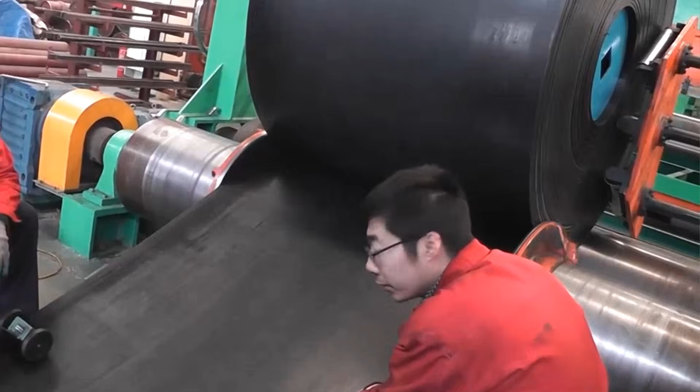The countdown began with number 9. Daniel Reyes arrived early for his shift at the Springfield, Illinois food processing plant on April 12, 2019. Known as Dan to his co-workers, he had spent 14 years maintaining the same conveyor system, often working extra hours to support his 2 children. He was assigned routine maintenance on a production line that had been flagged 3 weeks earlier. That inspection had documented an exposed roller missing its guard, and the report remained unresolved as production deadlines took priority.

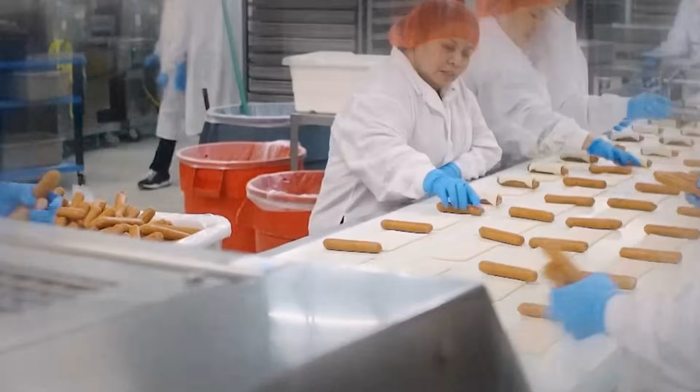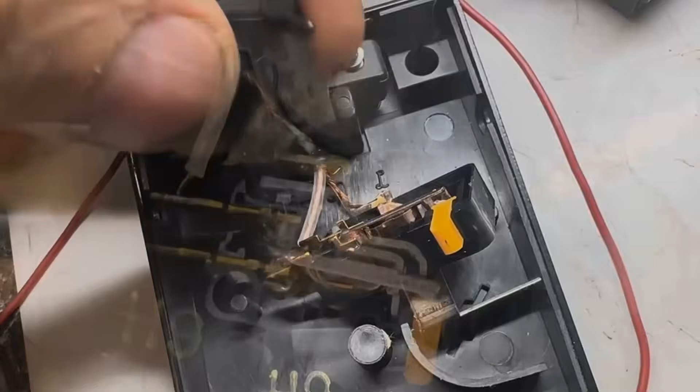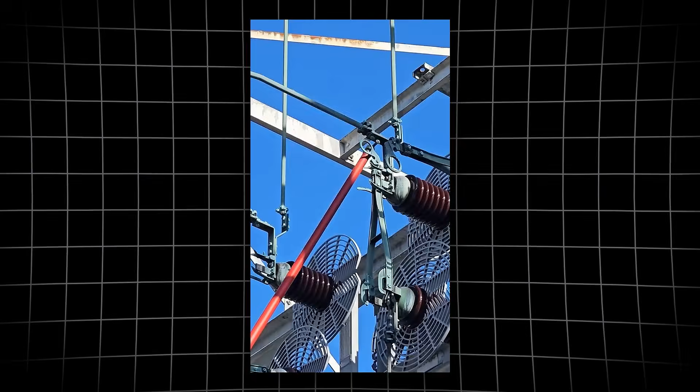That morning, Dan reached across the moving belt and his shirt sleeves snagged on the rotating roller. In seconds, his arm was pulled into the machine. He reached for the emergency stop, but the button failed because the electrical contacts were corroded. The conveyor's compression force pinned his torso, causing crush injuries to his ribs and lungs. Coworkers cut power at the main disconnect, but by the time paramedics arrived 7 minutes after the 911 call, Dan was unresponsive. He was pronounced dead 11 minutes after the call was placed.

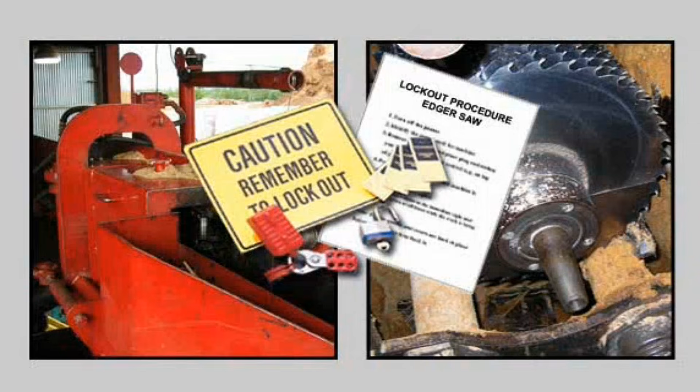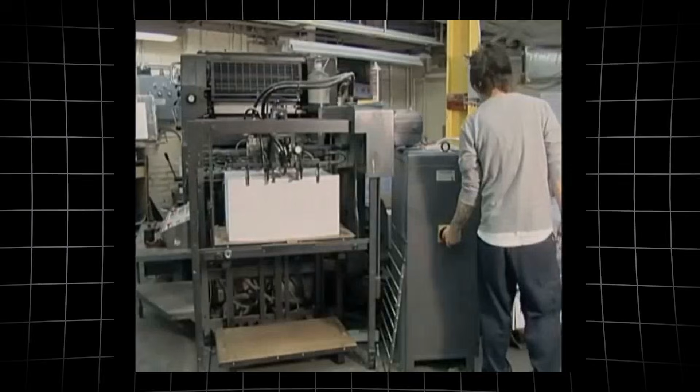OSHA cited the facility for lockout and tagout violations under citation number 2019145 and issued a $147,000 fine. Dan's family received a $1.2 million wrongful death settlement. The case triggered a nationwide amendment to 29 CFR 1910.147, mandating strict enforcement of lockout and tagout protocols in all U.S. factories.

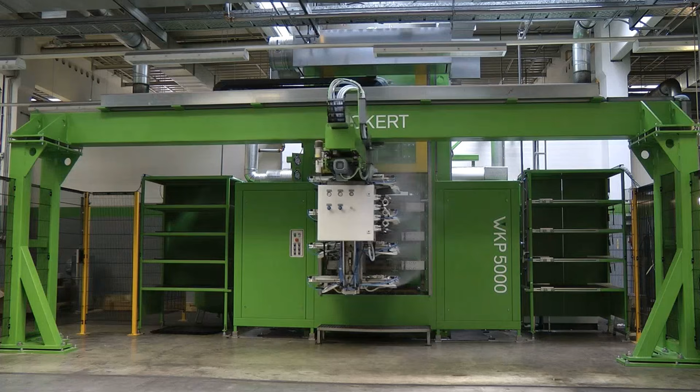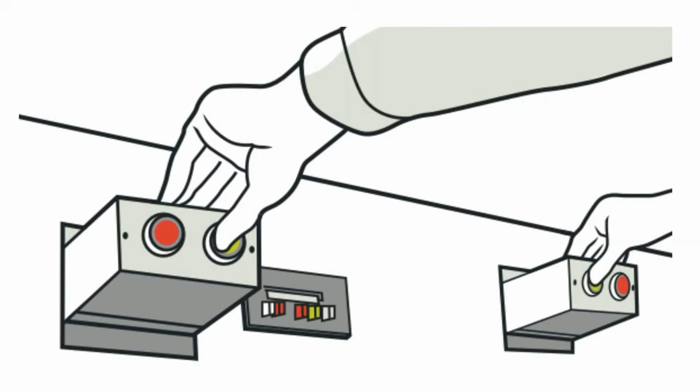Jacob Mills was 28 years old, recently engaged, and had just been promoted to quality control inspector at an auto parts plant in Chattanooga, Tennessee. On August 19, 2020, he was assigned to inspect a finished component inside the Omnivex H3000 hydraulic press. The press cycled every 8 seconds, a rhythm Jacob knew well. That day, the 2-hand control system, meant to keep both of his hands safely outside the chamber, had been jumper wired to speed up inspections. A faulty PS42 pressure sensor falsely signaled the press was clear, even as Jacob leaned in.

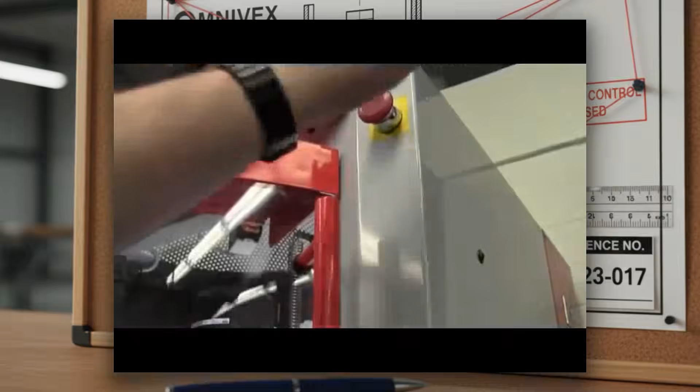The chamber closed without warning. The descending ram crushed his head and torso, causing catastrophic trauma. Coworkers hit the emergency stop within 2 seconds, but the force of the hydraulic system made rescue impossible. Jacob was pronounced dead at the scene. The press lacked a light curtain, a safety feature that would have prevented activation with a person inside.

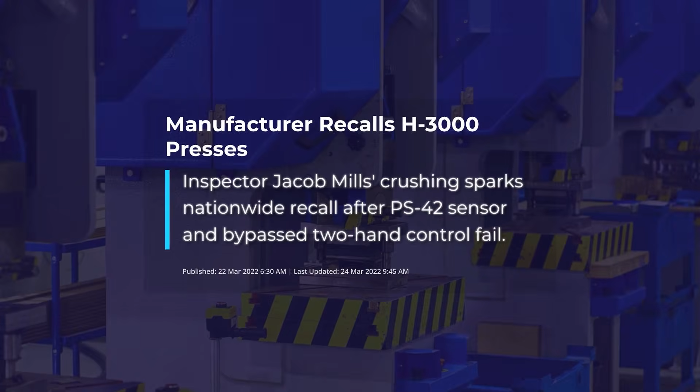District attorneys filed reckless homicide charges against plant management. The press manufacturer issued Recall 20042 for all affected models. ANSI B11.2 was updated, making light curtains mandatory across the industry. Jacob's death forced a nationwide reckoning with the dangers of bypassed safeguards and single sensor reliance.

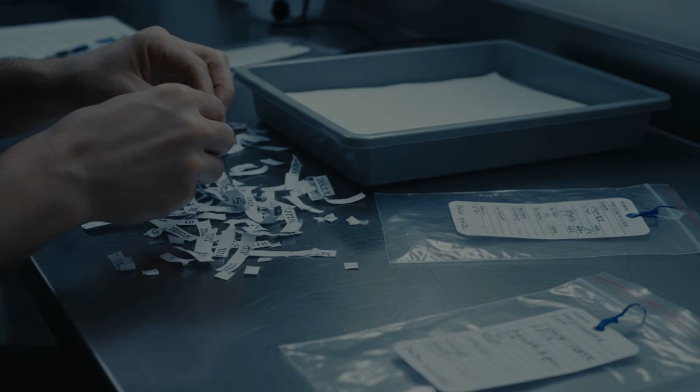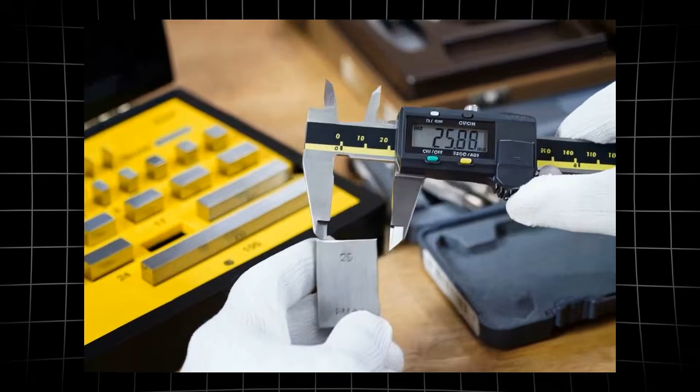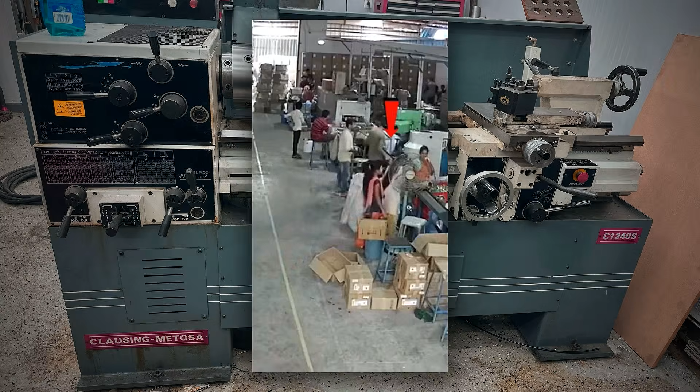Olivia Chen arrived at her Albany metal shop before sunrise, as she had for 15 years. At 42, she was a mentor machinist, respected for her precision and the way she guided new hires through the hazards of rotating equipment. The company handbook required hair restraints, but enforcement had faded into routine. On February 11, 2021, Olivia prepared a custom order on a Clausing-Metosa C1340S lathe, setting the spindle to 1,200 revolutions per minute. A single lapse, her ponytail left unbound, proved fatal.

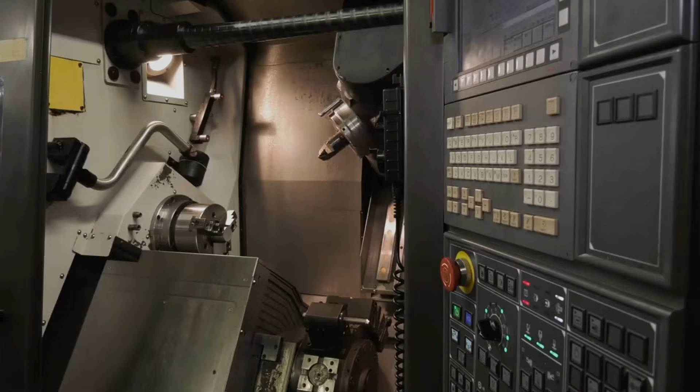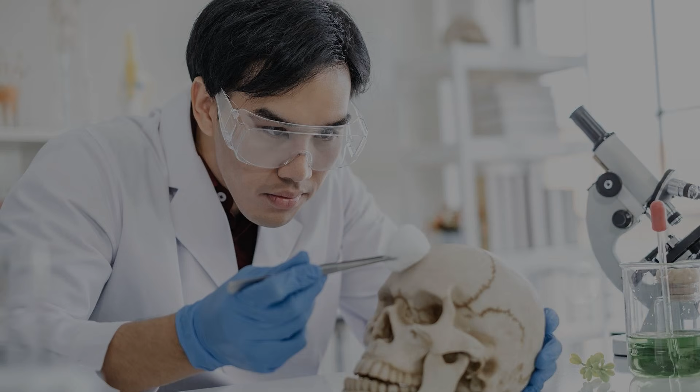As she leaned in to measure a cut, her hair caught in the spinning chuck. The torque at that speed tore her scalp away and slammed her head against the steel bed, fracturing her skull. The emergency stop was mounted 6 feet from her station, out of reach in those seconds. Co-workers dialed 911 as soon as they heard the impact. Paramedics arrived 6 minutes later, but Olivia died from head trauma and hemorrhage within 4 minutes of the incident.

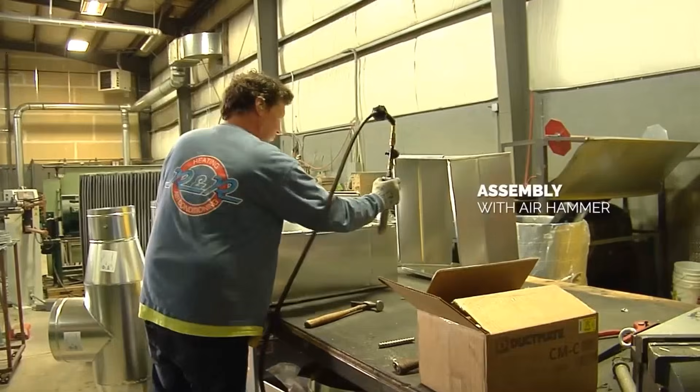Investigators found written policies for hair restraints, but no audits and no discipline for violations. The owner pled guilty to willful OSHA violation and served 6 months in jail. New York's Industrial Code Rule 121 was amended, mandating enforced personal protective equipment policies and reachable emergency stops at every workstation.

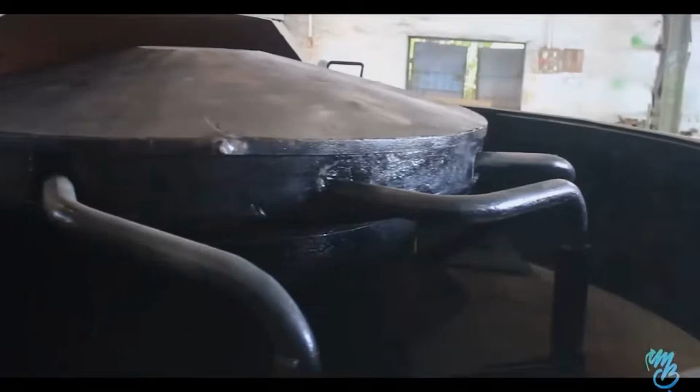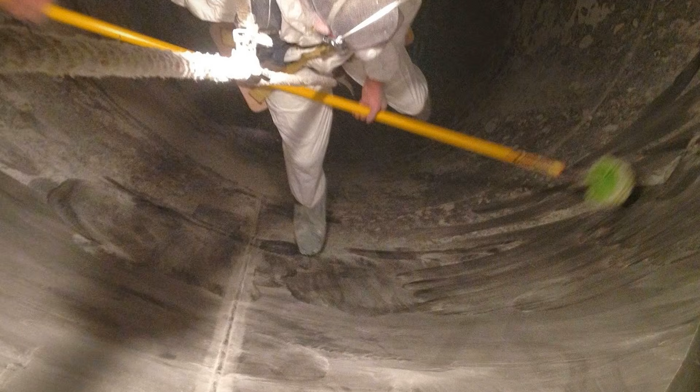Marcos Alvarez was 23 years old, single, and new to the overnight sanitation crew at a chemical processing plant in Portland, Oregon. On October 7, 2021, he was assigned to clean the interior of an 8,000-gallon Chempro MX 8000 industrial mixer. The vessel, a towering steel tank lined with chemical residue, required entry for deep cleaning. Protocol demanded a confined space permit and a trained attendant at the hatch, but neither was in place. Marcos entered the tank alone.

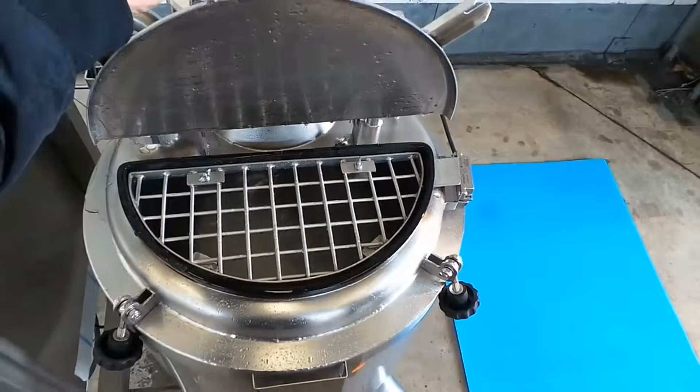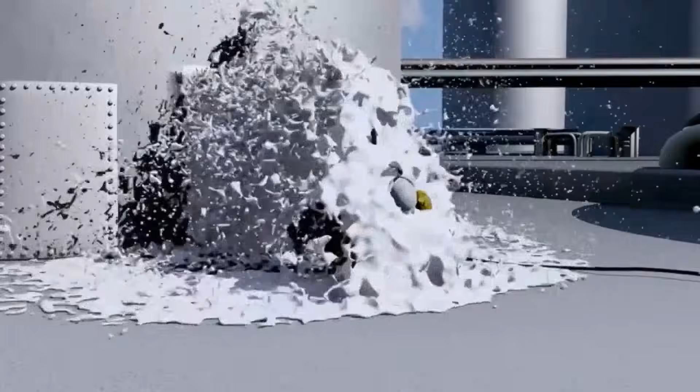The plant's wireless control system used Bluetooth signals to operate equipment throughout the facility. That night, a signal overlap from a nearby workstation remotely activated the mixer's internal agitator blades. Marcos was still inside. The blades started without warning, striking him and knocking him unconscious. He slipped beneath the chemical solution, suffering blunt force trauma and chemical burns.

There was no one posted at the entry, no one to notice his absence. 45 minutes passed before a co-worker realized Marcos was missing. By the time rescue teams arrived, he had drowned.

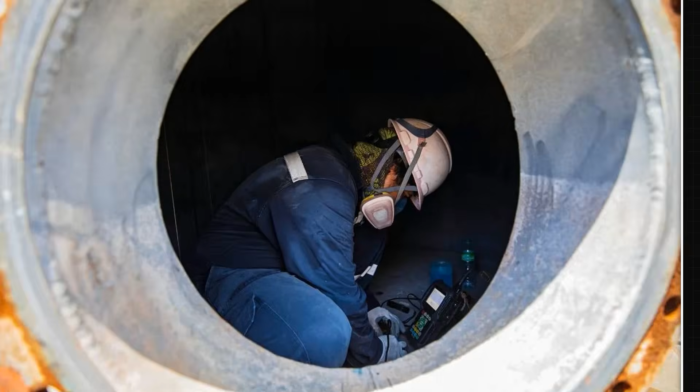The OSHA fatality inspection, case number 202022178, documented the absence of a confined space permit, the lack of an attendant, and the wireless interference that triggered the remote start. The plant received the maximum penalty, $250,000, and the incident led to a revision of NFPA 350, requiring wireless lockouts and strict confined space entry procedures nationwide. Marcos's death forced an industry reckoning with the unseen dangers of remote activation in enclosed spaces.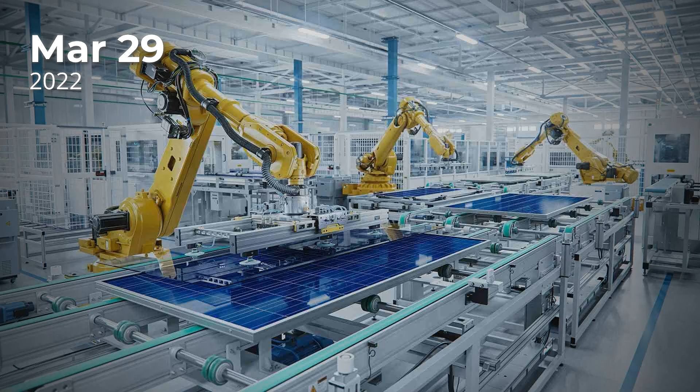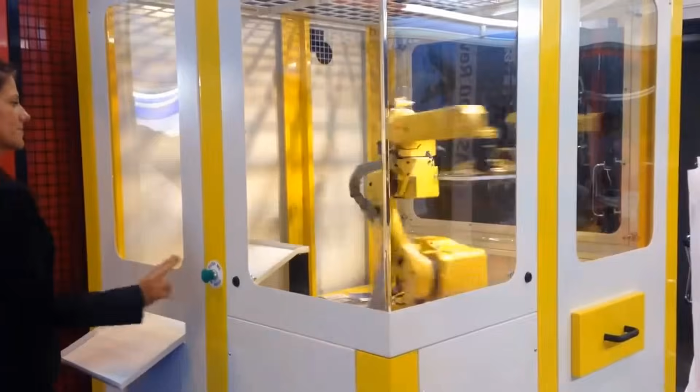Aaron Patel was 34 years old, married, and the chair of the safety committee at a Tucson electronics plant. On March 29, 2022, he began his shift overseeing a Fantrix R15 robotic assembly cell, a system he had helped install and routinely audited for hazards. The day's task was a servo replacement, which required the protective cage to be removed.

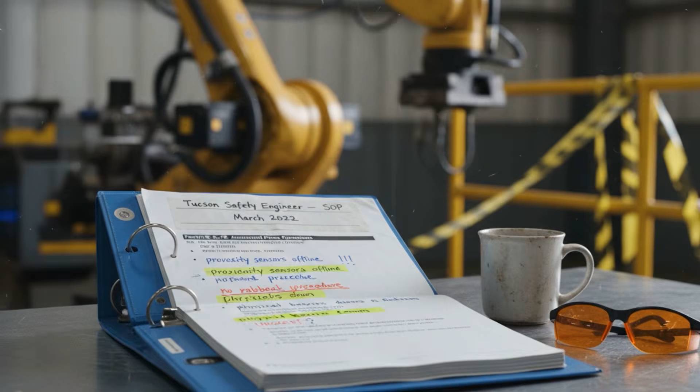With the cage off, the cell's motion sensors should have disabled the robot's movement, but a software update, firmware version 4.8, had corrupted the safety layer. The update, pushed overnight to improve cycle times, left the proximity sensors offline. No rollback procedure was in place, and the physical barriers were still down from maintenance. Aaron stepped in to check the robot's alignment.

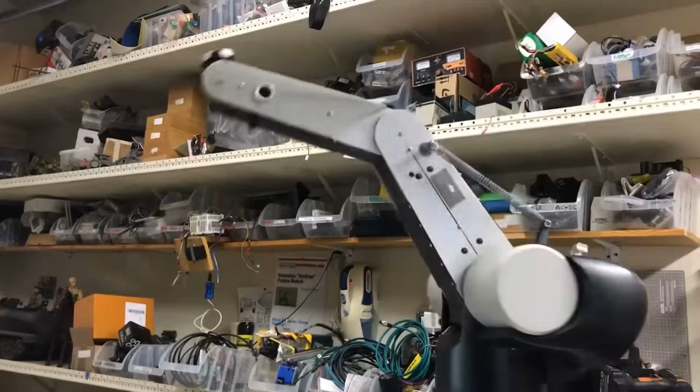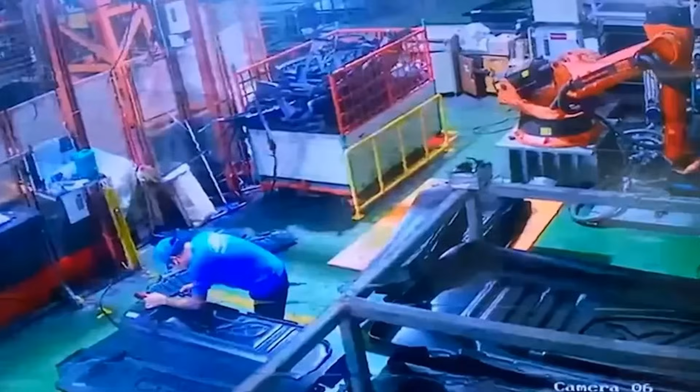The arm, reading no obstacle, suddenly accelerated. It pinned his chest to the steel frame, compressing his lungs. He struggled for air as the robot's servos held him in place. The plant's control room had no live alert. His team found him 12 minutes later. He died from asphyxiation within 6 minutes of entrapment.

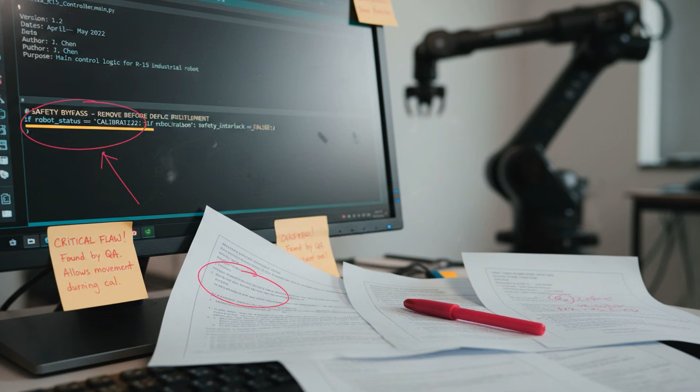The investigation traced the failure to a single line of code that bypassed the safety interlock. Recall 21-198 was issued for all Fantrix R15 units, and ISO 10218 was revised to require dual redundant proximity sensors on automated cells. The plant instituted strict cage removal protocols and software validation checks for every update. Aaron's death forced manufacturers and regulators to confront the risks of automation, proving that even the most advanced systems were only as safe as their last line of code.

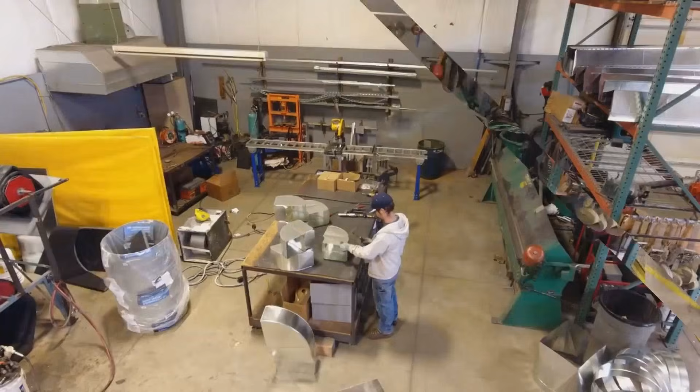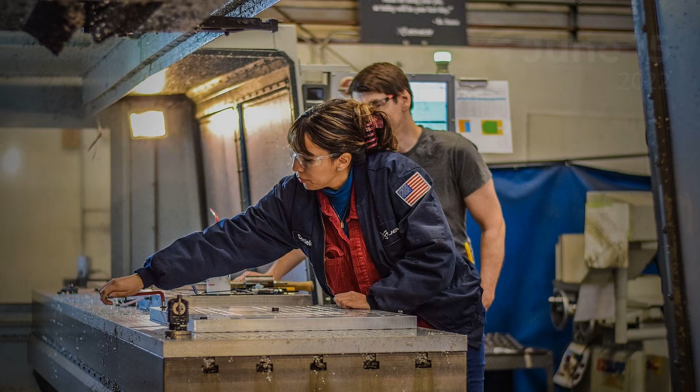Linda Gomez was 48 years old, a mother of 3, and a fixture on the shop floor at Midwest Sheet Metal in Milwaukee. Over 22 years, she had trained dozens of new hires on the company's aging presses, always stressing the importance of safety. On June 15, 2022, Linda was mentoring a recent recruit, demonstrating the correct way to align sheet metal in the ColeTech 200-ton stamping press.

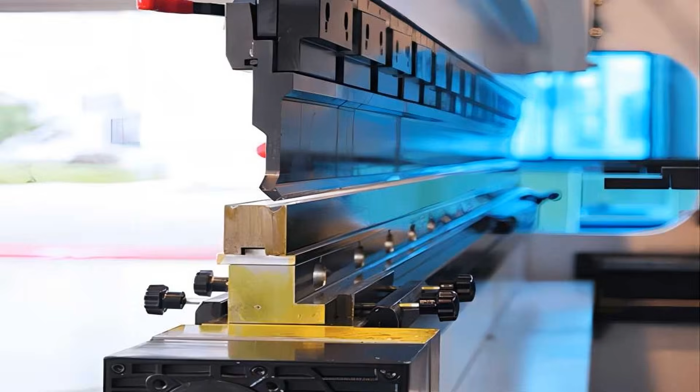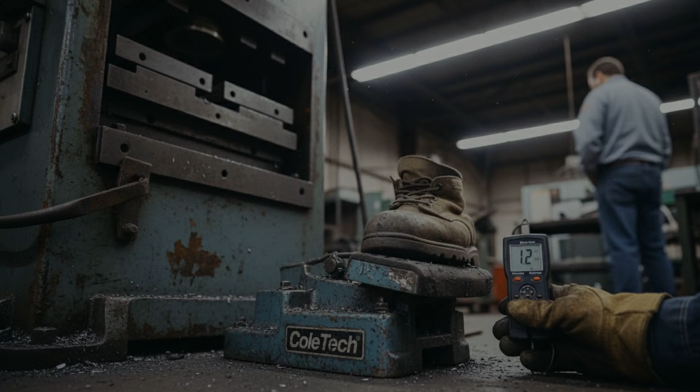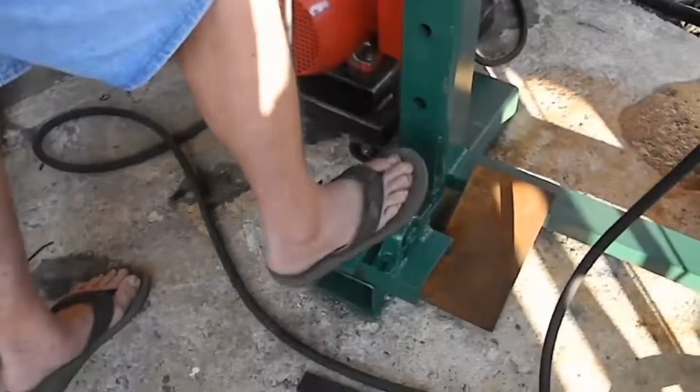3 weeks earlier, the press's point of operation guard had been removed for repair and never reinstalled. The work order for a replacement sat unsigned as production quotas mounted. The press relied on a foot pedal to cycle, a model known for its hypersensitivity. The worn pedal on Linda's machine could trigger with as little as 1.2 ounces of pressure, barely the weight of a pencil. That morning, as Linda reached into the die to show the trainee proper hand placement, her foot brushed the pedal. The press cycled instantly.

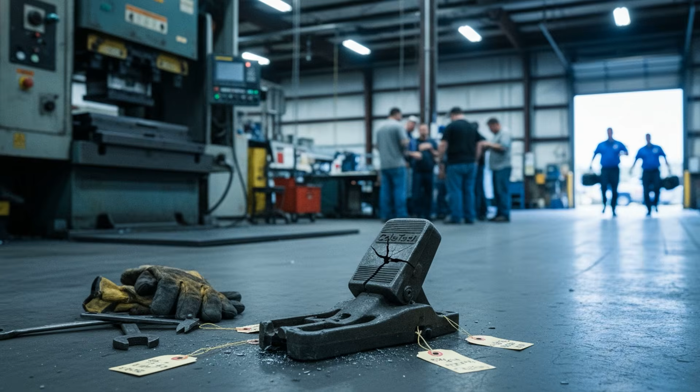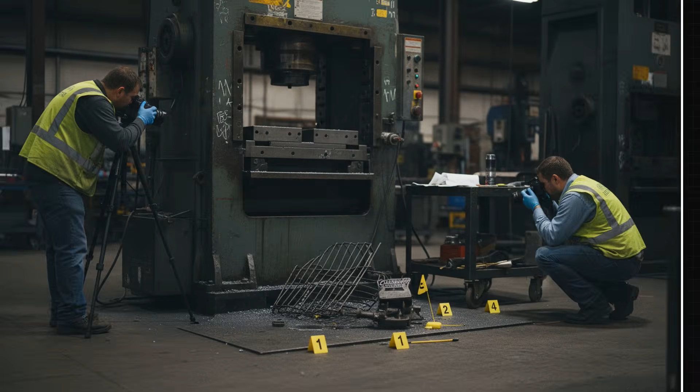Both of Linda's hands were caught between the steel dies, severed above the wrists by a force exceeding 80,000 pounds. She collapsed, bleeding heavily, as the trainee dialed 911. Paramedics arrived in 7 minutes, but Linda died from hemorrhagic shock within 14 minutes of the accident. Investigators found the missing guard, the defective pedal, and a pattern of ignored safety work orders.

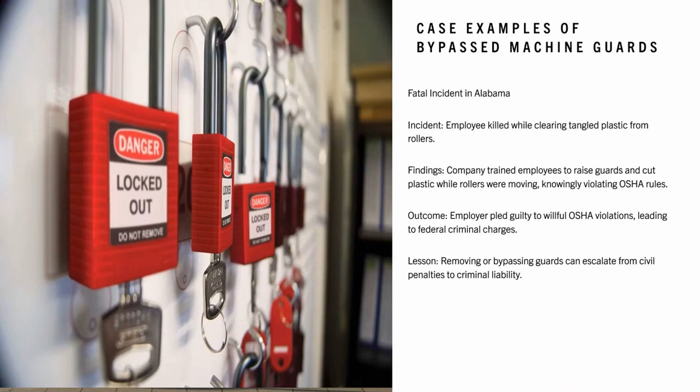OSHA issued a willful violation, citation number 2021-0041. The shop owner was convicted of manslaughter and sentenced to 3 years in prison. Wisconsin Administrative Code SPS 332 was amended, mandating 2 hand control systems for all presses statewide. The facility closed permanently. Linda's death forced manufacturers to confront the consequences of removing safety devices to meet deadlines, and it set a precedent for criminal liability when profit was put ahead of worker protection.

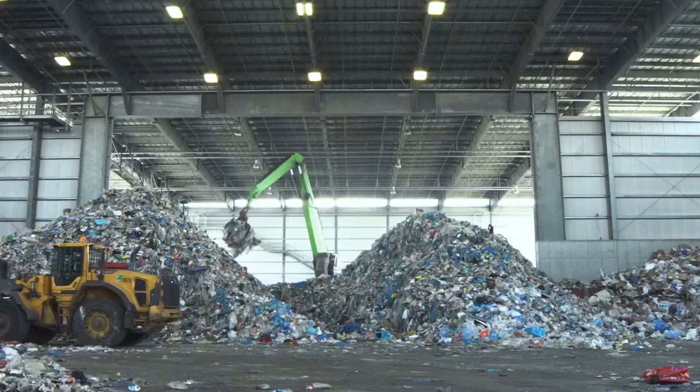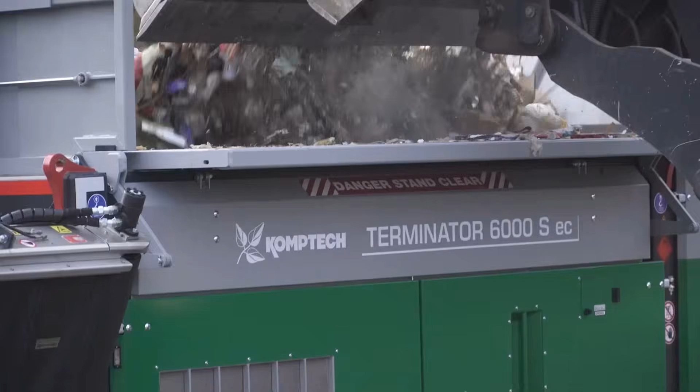Henry Lawson spent nearly 3 decades at the Baltimore Materials Recovery Facility. He worked his way up from line operator to senior waste management technician. At 52, with retirement just 2 years away, he was known for his steady presence and encyclopedic knowledge of the plant's machinery. On the morning of September 16, 2022, Lawson was called to clear a jam in the Shredmaster SM6000, a massive industrial shredder used to process construction debris.

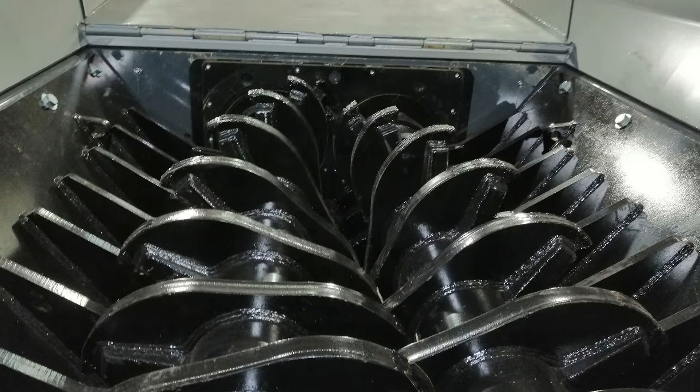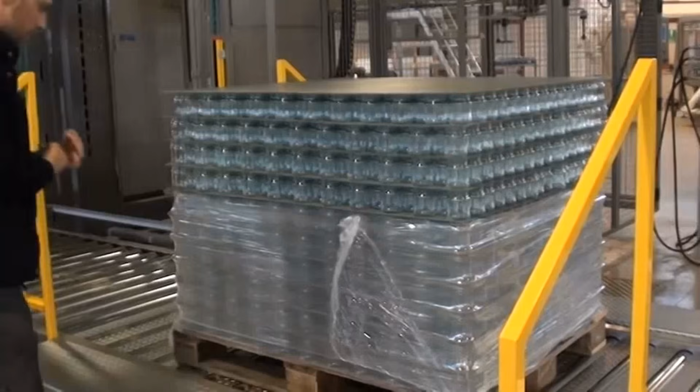The only access was from a steel catwalk, 15 feet above the machine's intake. The railing on RA11 had failed its load test in a safety inspection 6 months earlier. Corrosion was documented, but repairs were deferred. Lawson clipped his radio to his belt and leaned over to dislodge a jammed pallet. As he shifted his weight, the corroded railing gave way with a sharp crack.

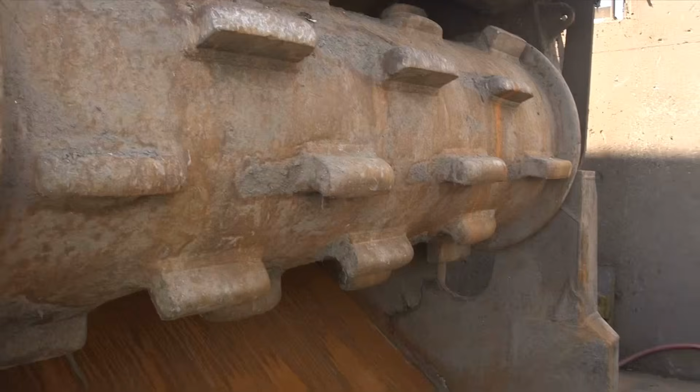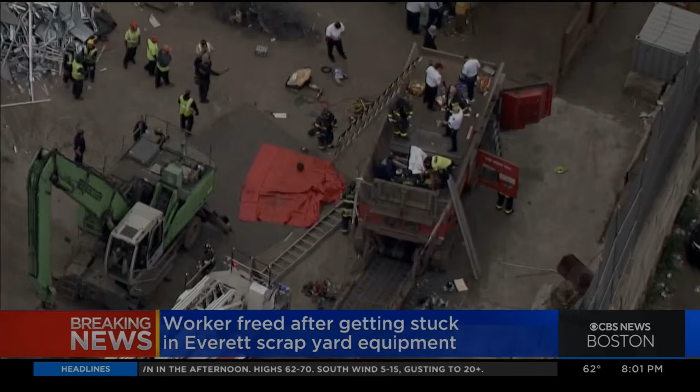He fell, striking the shredder's edge before tumbling into the active cutting mechanism. The SM6000's rotating blades, designed to tear through steel and concrete, offered no resistance to flesh and bone. The emergency stop was triggered within seconds, but recovery teams faced a grisly task that lasted nearly 3 hours.

Investigators found that the facility had failed to follow up on the documented corrosion, despite the ANSI Standard A1264.1 requiring timely remediation of structural hazards. OSHA fined the company $412,000 for willful safety violations, and prosecutors indicted senior management for negligent homicide.

Lawson's death led to an immediate amendment of the ANSI Standard A1264.1, mandating strict timelines for repairing structural deficiencies and requiring fall protection harnesses for all elevated work. The case set a new legal precedent for corporate accountability, as the company faced both criminal charges and civil suits from Lawson's family. What began as a routine jam clear exposed the deadly cost of ignoring maintenance warnings, shifting the burden of liability from individual workers to corporate decision-makers.

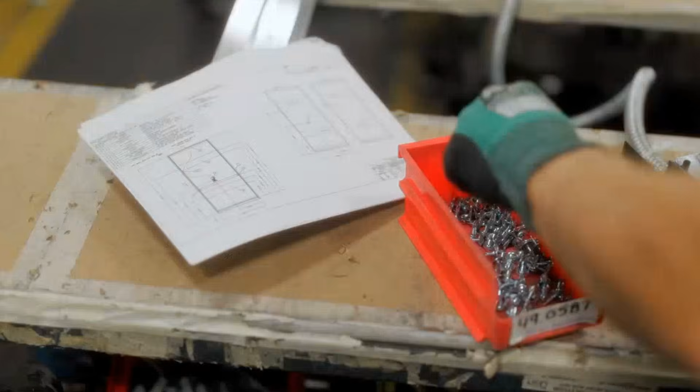Victor Ramos started his shift at the Atlanta Precision Stamping Plant on February 9, 2023, just before dawn. At 37, he was a skilled tool and die maker, known for his attention to detail and steady hands. His twin daughters, born the previous fall, were the reason he took every overtime slot he could.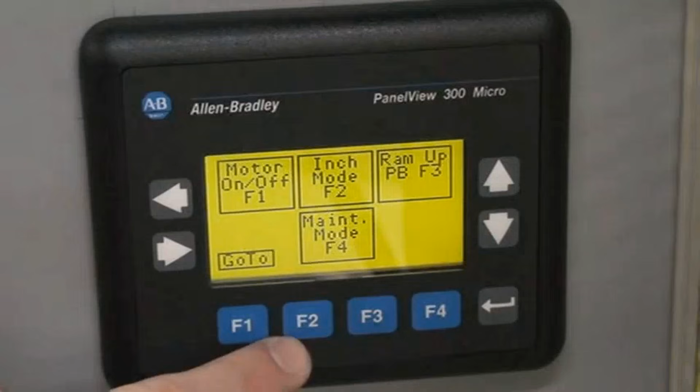That morning, Victor was assigned to adjust the die inside a Press Pro MX55 model, a machine he had serviced dozens of times. The press was set to single-stroke mode, designed to cycle once per foot pedal press with a CD22 clutch mechanism at its core. The CD22 had a documented history. Since 2015, OSHA's IMIS system logged 17 separate reports of unexpected double cycling on the same clutch design.

Each incident involved the press completing its stroke, then, without warning, initiating a second cycle. The manufacturer received these reports but deemed a recall not economically justified. Instead, they issued internal bulletins and left presses in service, calculating that settlements would cost less than a full-scale recall or redesign. Victor finished his setup and pressed the foot pedal.

The press descended, completed its stroke, and rose as expected. He reached in to adjust the die, trusting the single-stroke setting. In that instant, the clutch slipped. The machine cycled again without warning. Both of Victor's arms were caught between the die and the bolster, and were severed above the elbows. Blood loss was immediate and catastrophic, 2.1 liters in less than 8 minutes. Co-workers applied tourniquets and called 911, but paramedics pronounced Victor dead at the scene.

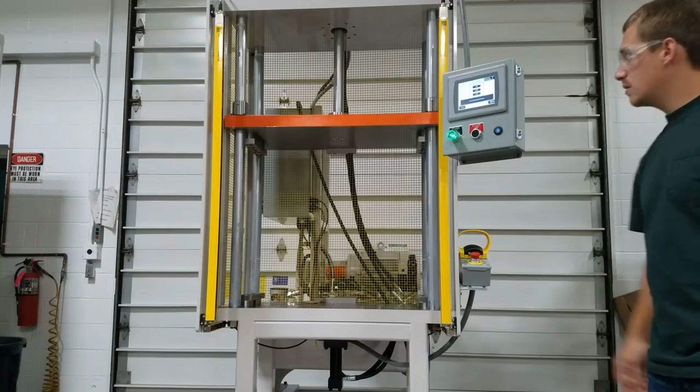He never regained consciousness. The investigation uncovered the manufacturer's prior knowledge and internal cost-benefit analyses. Federal prosecutors indicted company executives under Title 18, Section 1349, for conspiracy to commit wire fraud, citing deliberate concealment of the defect. Victor's family received $38 million in a civil settlement. ANSI B11.1 Clause 8 was revised to require dual clutch interlocks and fail-safe mechanisms on all new presses. The case forced an industry reckoning. Safety could no longer be weighed against the bottom line when lives were at stake.

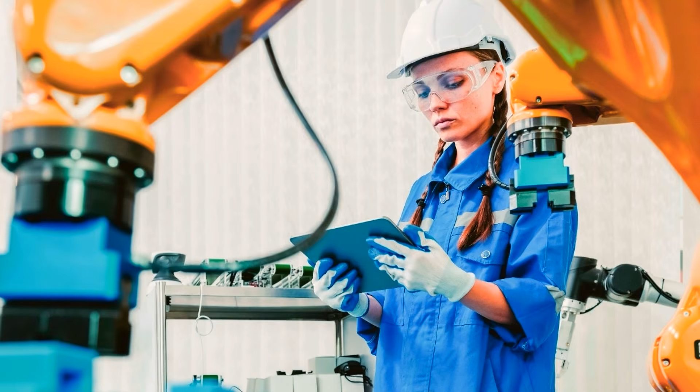Sarah Whitaker's day began at 5:30 a.m. in Des Moines, Iowa, as it had for the past 2 decades. At 46, she was the senior maintenance engineer at Hearth Foods, a commercial bakery known for high-volume production and tight schedules. Her teenage son depended on her steady paycheck, and co-workers described her as the backbone of the maintenance crew.

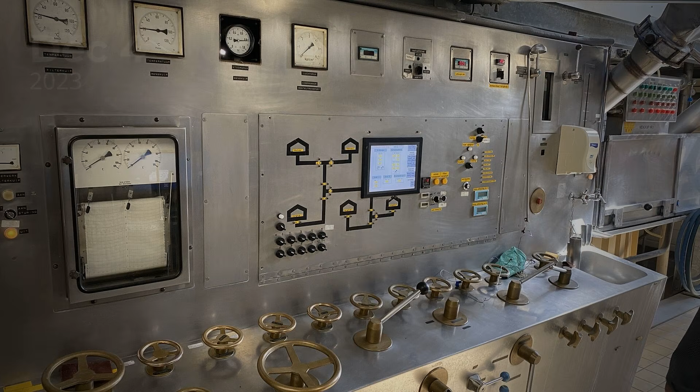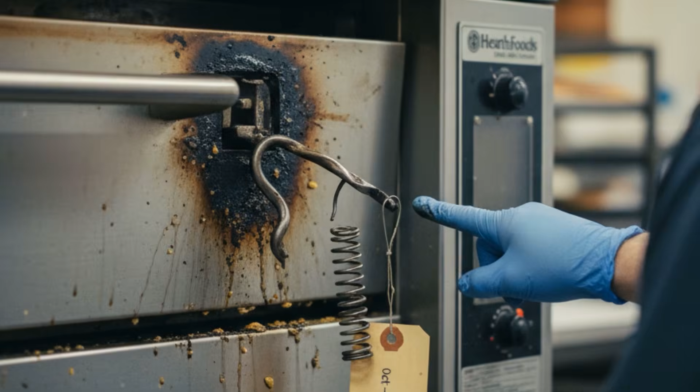On December 4, 2023, Sarah was called to troubleshoot a temperature sensor inside the ProBake XL90 industrial oven. The oven was in standby mode, with a cleaning cycle scheduled to run before the next shift. For 5 weeks, the internal emergency release latch had been broken, a fact noted in maintenance logs, but left unaddressed as parts orders were delayed and production quotas pressed on.

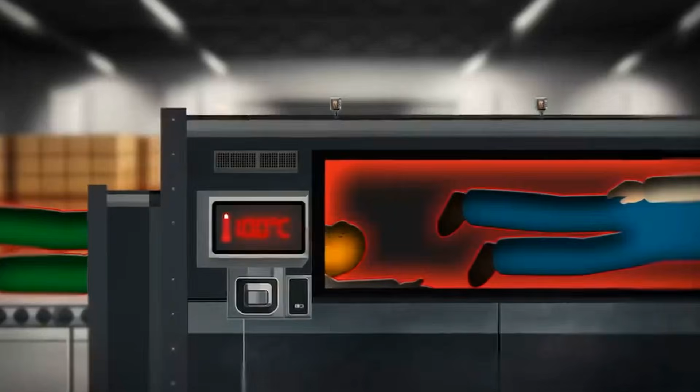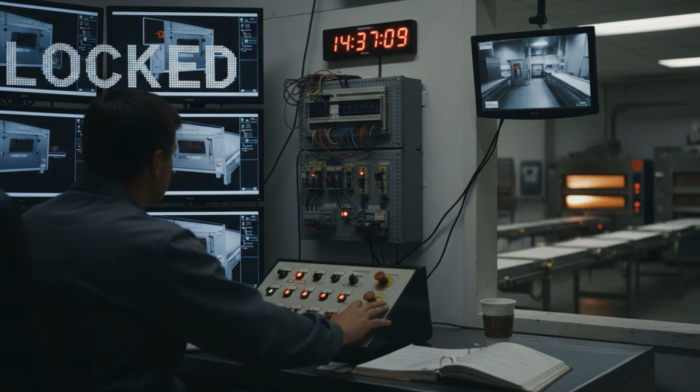Sarah entered the oven, bypassing the standard lockout procedure to avoid disrupting the morning bake. The oven's automatic door lock engaged as the cleaning cycle initiated, sealing her inside. Within 2 minutes, a coworker in the control room heard frantic pounding, but the external override failed to disengage the lock. The oven's temperature ramped up, reaching 500 degrees Fahrenheit in under 4 minutes. Trapped, Sarah's core body temperature soared past 109 degrees. Hyperthermia and smoke inhalation overwhelmed her in less than 6 minutes. Co-workers tried to force the door, but by the time firefighters arrived, she was already dead.

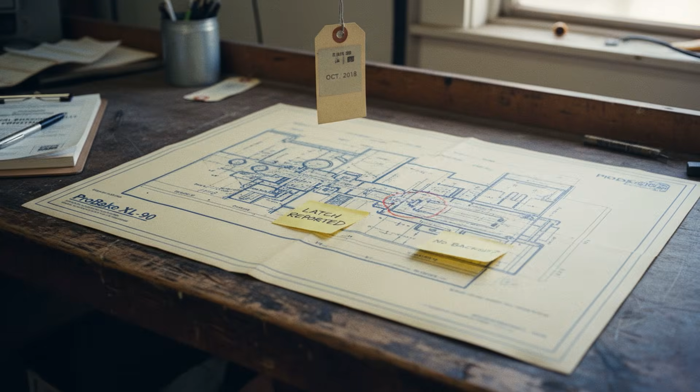Investigators found the broken emergency latch had been reported repeatedly, with no repair authorization issued. The ProBake XL90's design lacked a redundant egress system or a temperature-sensing interlock that would have halted the cycle if a person had been detected inside. State prosecutors charged Hearth Foods executives with criminally negligent homicide, case 2024 CR 118. OSHA fined the company

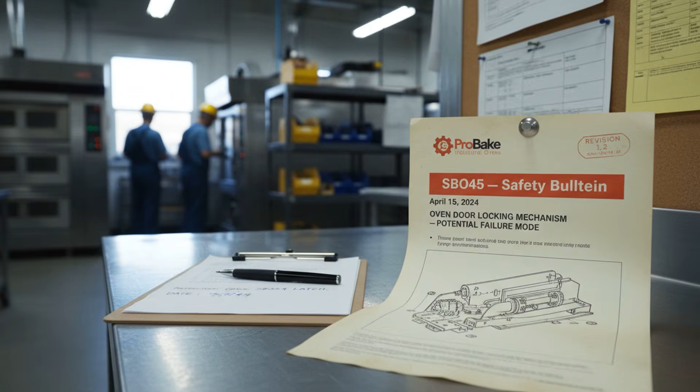$623,000 for willful violations. The oven's manufacturer released Bulletin SBO 45, mandating dual emergency exits and temperature-triggered lockouts on all future models. Sarah's death forced the industry to recognize that every shortcut, every ignored warning, and every design flaw carried a preventable human cost that could not be undone.

Across all 9 tragedies, one pattern stood out. Every rule in industrial safety had been written in the aftermath of preventable loss. The most experienced workers did not fall to chance. They fell to broken systems and ignored warnings. Safer factories existed because someone did not come home. Industrial progress was not measured only in output, it was counted in lives saved. Every regulation stood as an unspoken memorial.